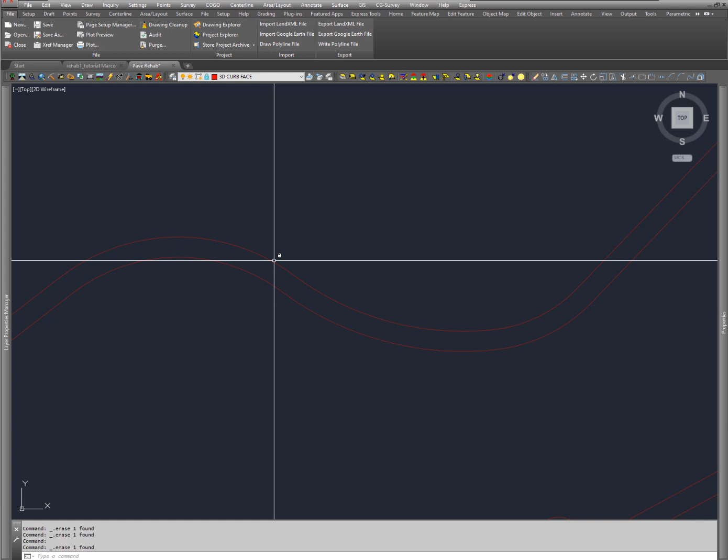I want to go over some different approaches that I'll use to generate a center line sometimes. Now, on this job, what we do is we've got a bunch of shots that were taken in the field that represent points all around here. And I've got to make a center line out of this. So the approach is, because I don't have a true center line, I'm going to work off one of the edges and kind of come to the center.

So let me show you some of the settings, at least in Carlson, that I use to kind of get these things put together to make some sense. Now, there's a lot of different settings here, even though it doesn't seem like there's that much. I always want to try to make these curves tangential, because if we get too much of an angle change from one to another, it's going to cause machines to jump. So this makes a better looking center line, but sometimes it causes problems.

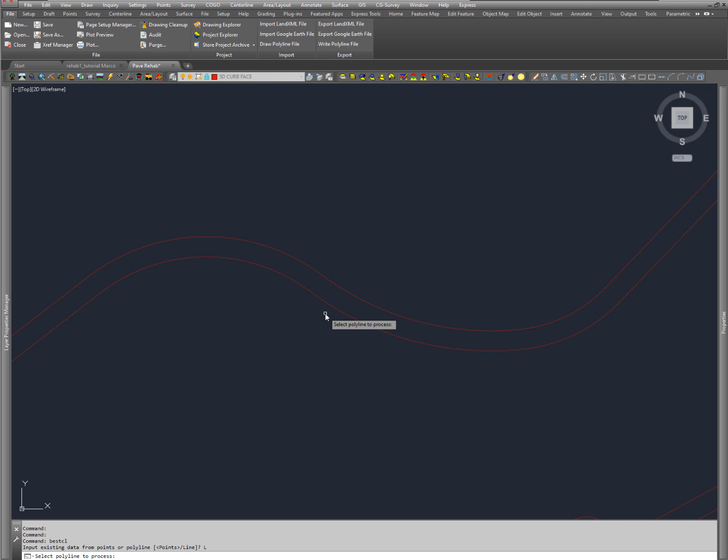Now this is a pretty big snap tolerance, so let's kind of bring it down to, well, let me just kind of show you some things here. So here's 2500ths, and I want a good number of points, and radius I really don't care about. And we're going to come here and pick this polyline, and I see now that my average residual is about a half a foot, and the max is a little bit over 3.

That's just too much. So let's go back in and at the space bar, bring up the command again, and let's get a little bit tougher here and see what we can get as far as a decent looking center line. Again, I still got a half a foot. I'm over 2 foot, not good enough. So what we have to do is really get kind of tough with this thing and hold it tight.

So I'm just going to really push this hard and increase the number, the point for the arc, and say OK, and pick this. And now we're going to get a lot better result. Now I've still got a little bit over a foot residual in one spot, or at least the max. And I'm going to kind of scroll down here and kind of look, and it seems to be in an area over here that's fine. I may have to redraw that or just take a look at that individually, but for the most part it's pretty decent.

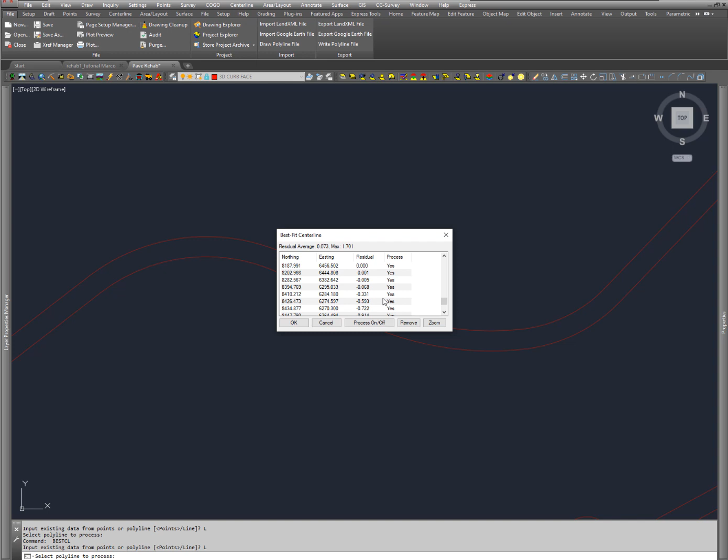And you can see this actual line, the white line is on top of the red line, and here's a deviation here that you can see between the two. So it usually works out okay, but sometimes I've really got to take it and crunch it to get it to perform better. So what we've got to do now is turn this into a center line,

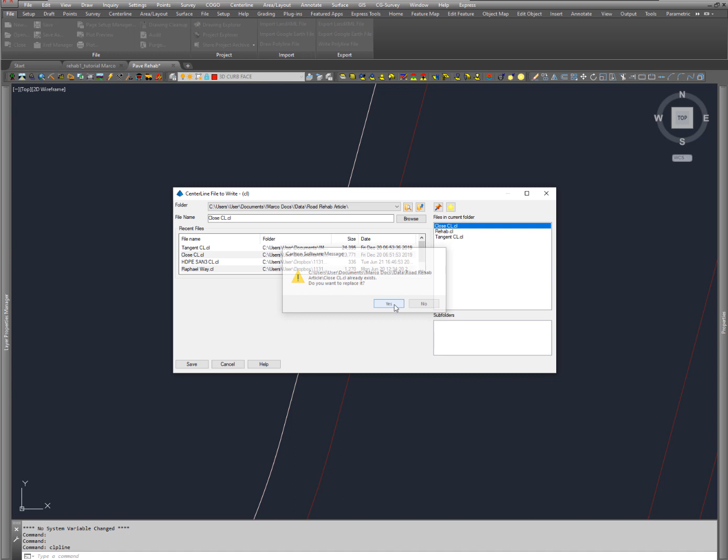and pick on this here, and this is a close center line, so I'm there, and we're going to replace this, and we'll pick the center line here. And what I want to do, it's going the wrong way, so I'm going to type an R to reverse, and then my stationing is at 154+00 to start with, and I'm going to take a look.

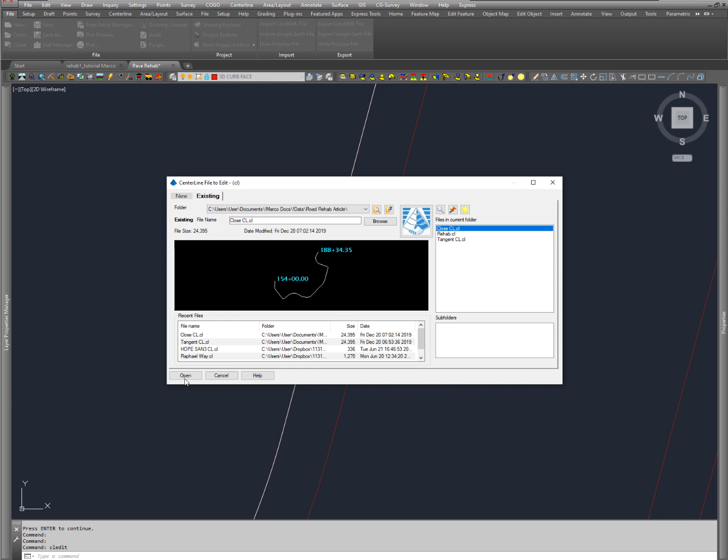Now here's the good and the bad thing about these center lines is they look real great, but when you look at them individually, we just got a bunch of line segments. Yeah, it's kind of a drag. They're all really short because that's what we told the program to do, was to come in and break these arcs up into tangent sections, and we're just going to kind of have to live with it unless somebody wants to really sit and draw this thing out and try to make it work with arcs and so forth. It's not real pretty, and the COGO to try to turn into something else becomes a real problem.

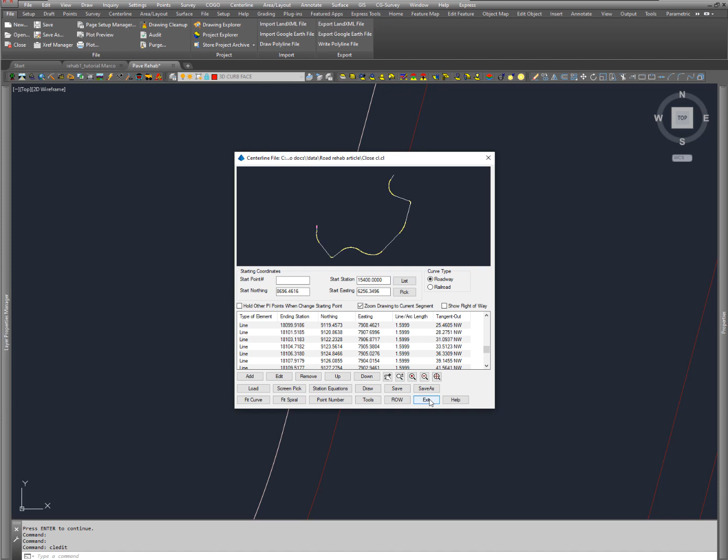So I think that you can use this, but you got to understand what this thing is and how it's performing and what pieces you have to make this thing go together. So with that being said, you've got one of the pieces put together to make this thing happen, and that's a pretty big deal. So you're well on the way to getting a rehab project done, because at least now we do have a center line.